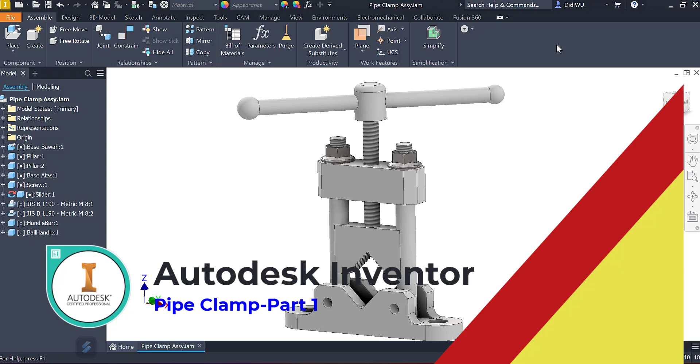So today we are going to create this pipe clamp assembly like in the picture here. Right now I'm using the Inventor 2023 version, and this tutorial is intended for the beginner level. So let's get started.

In Inventor, you should have a home here. This is where your project comes, so I'm going to close my previous file. Then you can create a new project. The project basically manages all your projects. Right now I'm currently working on the CADCAE.

This is where the project is saved under your directory. Click next, and use the library if you have any previous library from your previous project to import into this new project. Otherwise you can skip it and click finish. If the project path doesn't exist, it should be created, then click OK.

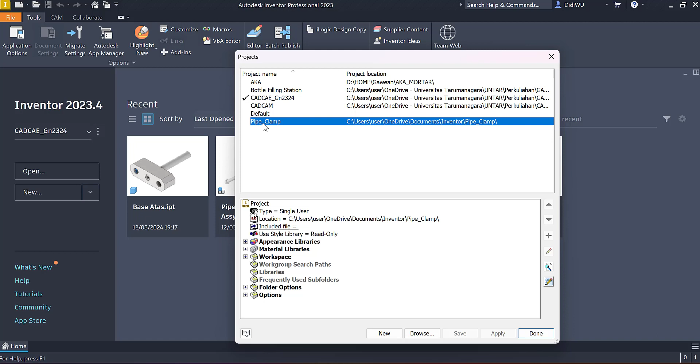Right now your project is not active yet. The active project is the previous project. So when you want to activate it, you need to close all the Inventor files first.

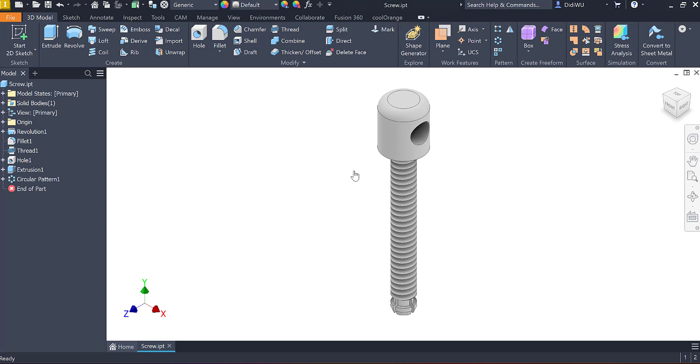Do I have to wait? I think I have to open this one up first. This one has to be open, Inventor project. Really, I need to close all the project files. Okay, you can look up the close all files option.

Then I change to Pipe_Clamp here. So this one is a new project. When you see the new project, there are no files, so we can create one.

Usually I use the new option here, but instead of using part or assembly - part basically is just a single part of your design, and assembly consists of multiple parts, with relationships between each part so Inventor knows how they assemble together.

Drawing is basically for creating the 2D drawing for documentation, and presentation is to create the exploded view from the 3D model, and then you can also generate drawings for documentation.

I usually use the browse template here, to make sure my template is in metric. So here there is a sheet metal, DIN standard, and also the millimeter standard. I will choose the standard millimeter.

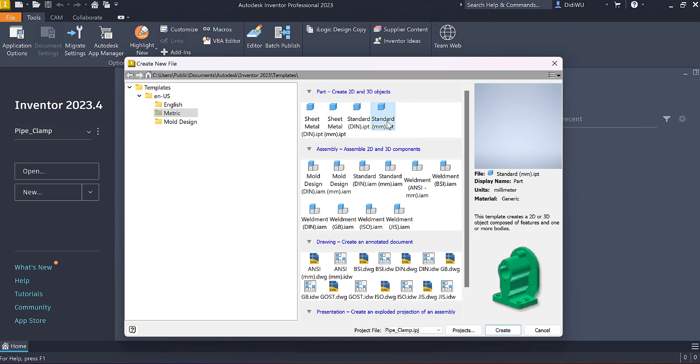So if you are creating a design which does not consist of sheet metal or thin plate, like this example picture here, then you should use this standard millimeter. So I will click create for standard millimeter.

So this is the part. This one should be part one, but don't bother with this naming because I already created multiple parts, so in this case they are counting 1, 2, 3, 4, etc.

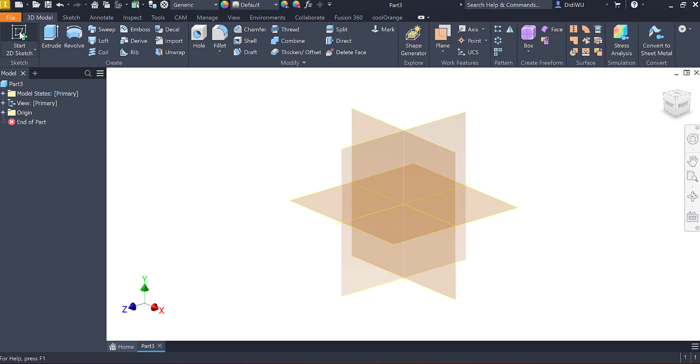Right now we are in the new environment, where you usually need to create a new sketch. I will use this plane, which is the XZ plane, because I want to work on the top view for the y-axis. So I click here.

Then I create the rectangle. When you hover your mouse into the center here, it becomes a green dot, indicating a center point. So I just click and move the cursor, and I can use this dimension here, 25, and to switch between those two dimensions, you just tab on your keyboard, then that one should be 100, and click enter.

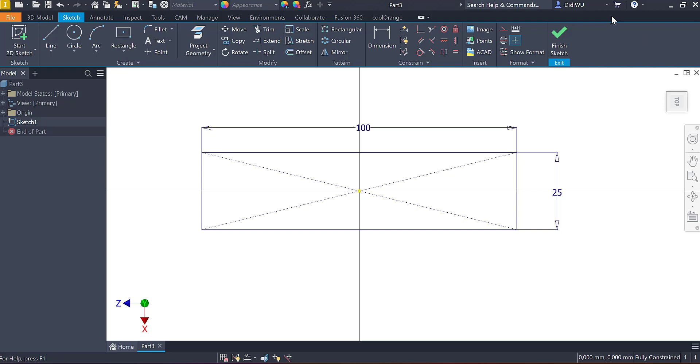Then it will create the rectangle for 25 and 100. So here we can click finish sketch because we already finished the sketch. Then I can use the extrude command. I will use 8 millimeters for the extrusion height, and then click OK.

Then I will create another sketch on top of this plate, and use the rectangle here. This rectangle should be on the center or middle, so I can use the vertical function - click vertical, and when you hover your mouse into the midpoint of this line, it will indicate a yellow-green dot.

Just click this dot for the origin. I should use horizontal instead, because this top view should be oriented with the x-axis - the horizontal is in this drawing. Why? Because as you can see, the x-axis indicates the horizontal, so when I click the horizontal constraint, it will align with the x-axis.

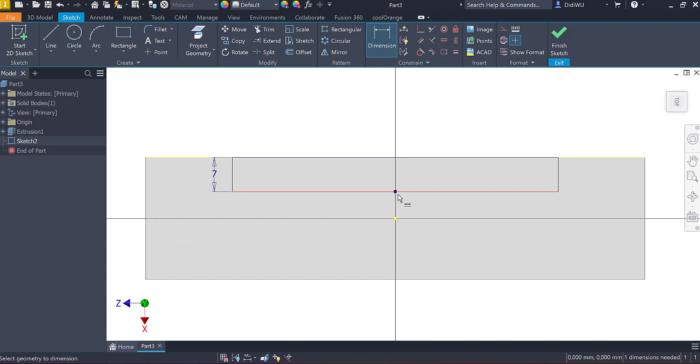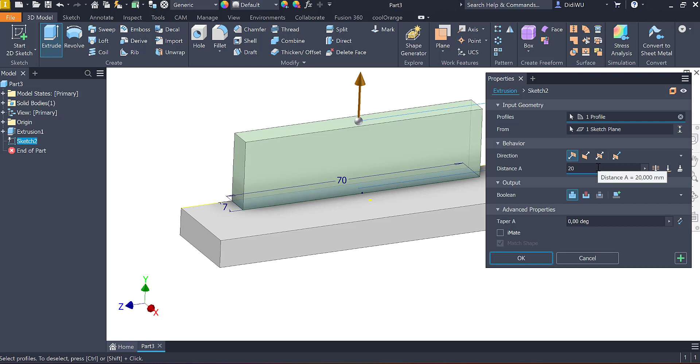I'm using, probably 20. I think for the first 20, that's enough. Then click OK.

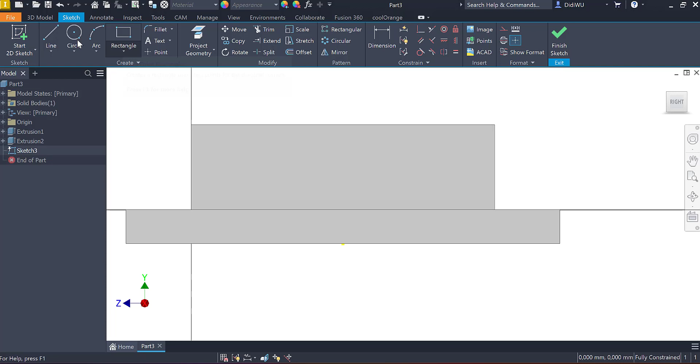I can create the sketch in here, probably from here. Then I will click the line to create the T-shape, which automatically creates the perpendicular when you click the line here.

So this perpendicular should be 90 degrees. Let me check the dimension. Yeah, degrees, okay, 90 degrees.

So I want to make sure that they are also on the center. So I click the horizontal - right now the y-axis should be the vertical one. This one, and this one.

So basically they will put this point right in the middle, but you can see the line here is not equal, so I will use equal line here and here. Then they were always on the same line.

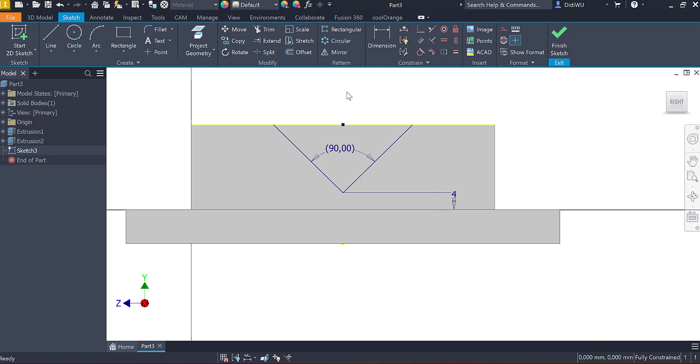Then if I use dimension to create the dimension from here to here, I will choose 4 probably for the dimension. So for checking, I can create this diameter of the...

...circle to indicate the pipe which is going to be planned. So in the design you should consider how large the pipe will be to fit into this shape.

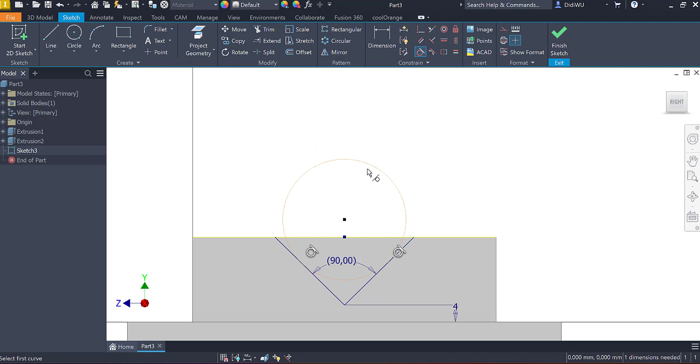Then I will click this one since this is just a construction line, so I click the line here and then click construction. So it becomes a dot path, and then I will use tangent from here to here and also tangent from here to here. And then I will use the diameter.

So for example, this pipe will be maximum 25 diameter, so equals to 1 inch more or less. Okay, I think it's probably good enough.

And then I will finish this sketch and extrude this one to make sure the extrusion is to all. Then click the line which is the cut. Then we will cut the part length. Then I will put the fillet over here.

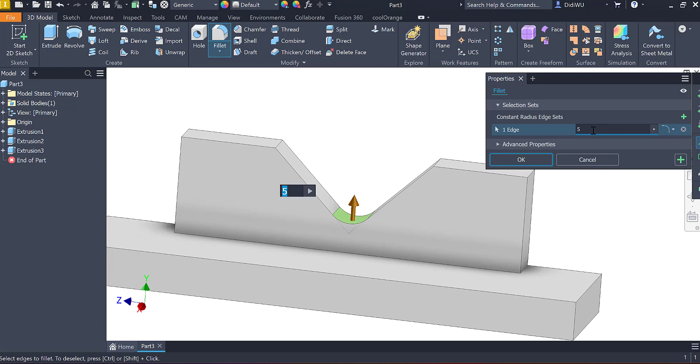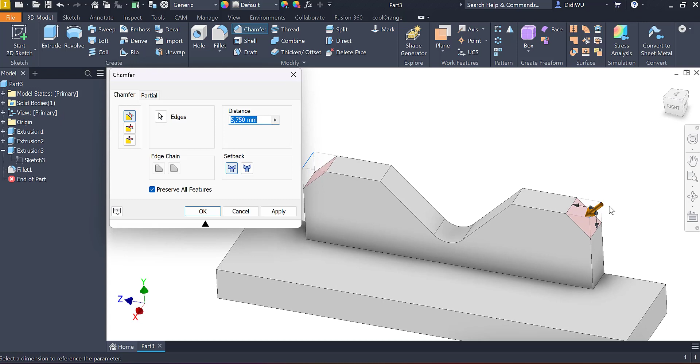Then for the chamfer, I could create a chamfer over here. But this chamfer, I think, is just for the appearance only, for the aesthetic, not for the functional.

I'm going to click this to add the chamfer over there. So then I will use the mirror over here as well.

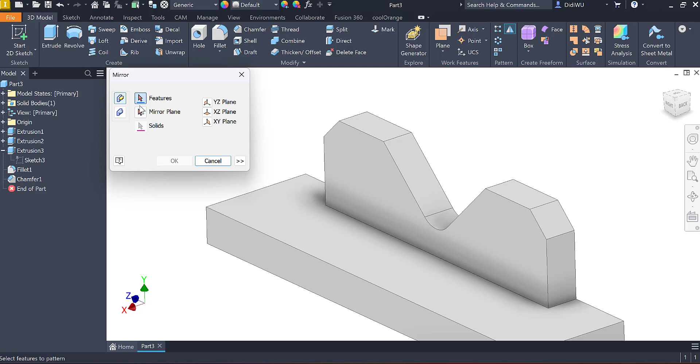So the feature will be this, and then the plane will be the YZ axis here, the YZ axis, okay, over there, and then click OK.

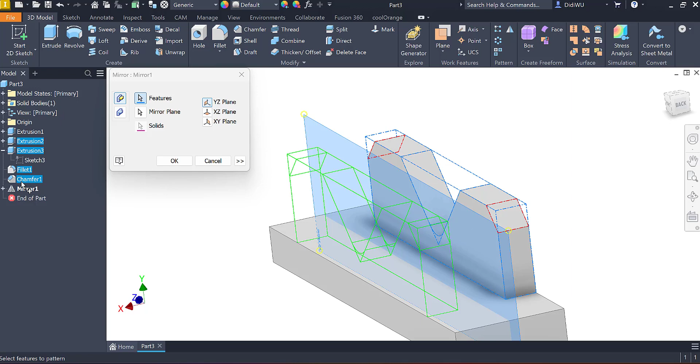I think it's the perfect position. Then I will measure, try to measure the gap over here - how much is the gap?

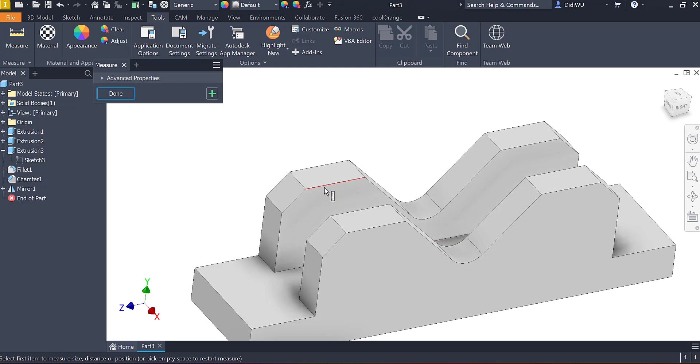So I use the measure here and also here. So the minimum distance is 11. So in between, I will use the pillar using the...

10 millimeter pillar. Before that, I will create a hole over here. Here I will create my hole over there. I will use the straight hole with none of the seat here.

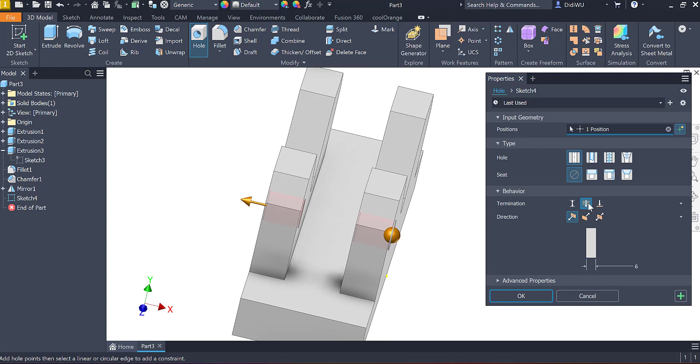Then diameter will be 6. Okay, then this one for the through all. One thing, I will use 6 for the diameter.

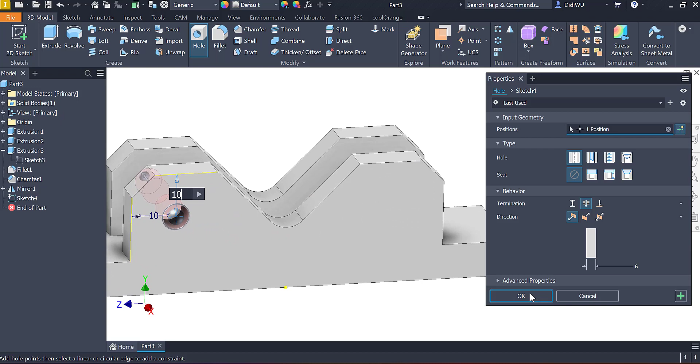Then the position - so for example, I want to make the position from here. This one is 10, and from up here is also 10, okay, 10 by 10. And then I'll click OK.

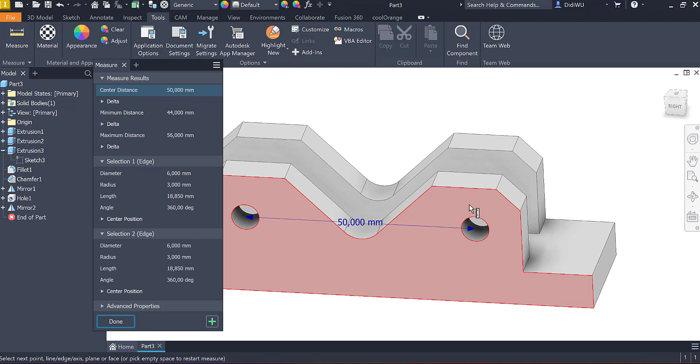Then I'm going to mirror the hole here with the mirror plane XY. So if I measure my center from center here to the center here, the center will be exactly 50 millimeters.

Okay, then I will use the fillet - this is the full round fillet over here. So full round fillet are basically just simple full round. This one for the A face, and this one for the center, and also this one for the B face.

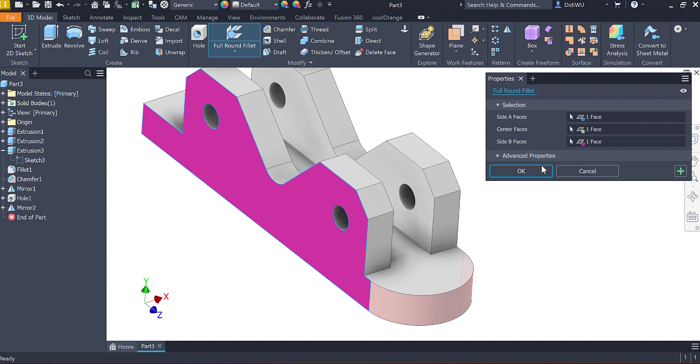And then one more time for the round here, here, and here. They will automatically create the full round fillet. Then I'm going to add the grid.

Right now I'm going to use the clearance hole with the counterbore seat, and I will choose JIS for the standard, using the hexagon socket screw, and I will use M5.

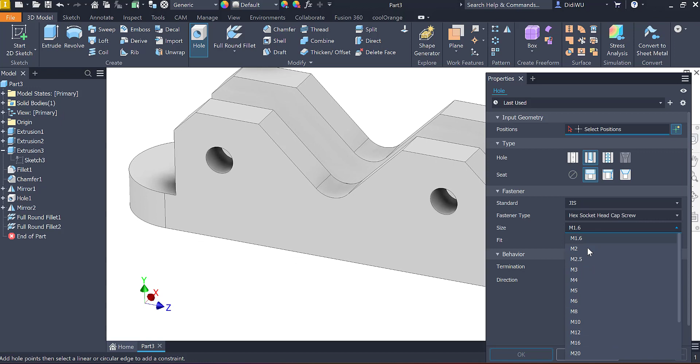I'll choose this position and this one to make sure the hole is concentric with the round over here. Since you already have one hole, if you want to add more, just click plus here, and it will create exactly the same parameter as the new hole. Okay, I think we are done creating the base view.

Then I will save the file. This is the part plan. I usually create a new folder to organize the part, so all my parts I will save there. This one is the bottom base, so I'll create the name with the bottom base.

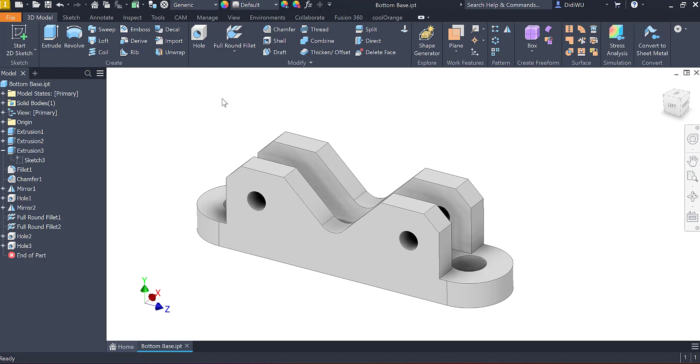Right now we are at the part level. If you want to create another part, I'm going to use the bottom-up method for this modeling. So I should come here and create a new assembly. I will close the template, then create the standard millimeter IAM, which is for the assembly file. We click here, and the environment is slightly changed because there is an assembly here. Right now we are entering the assembly level file, but there is nothing inside.

So you need to place a part at least, or create a part. Since I already created the bottom base, I will call it using place here, search for the file bottom base, and it will open. Basically Inventor will allow us to put all our objects into this assembly.

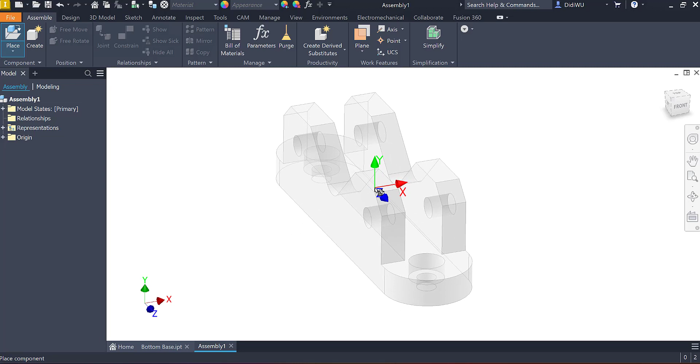But I suggest you right click here and place grounded at origin, like that, and then just escape. So when you see the icon here, there is a pin over there, meaning we cannot move this bottom base because it is already grounded to the file.

Then I try to save first, but please do organize your folder. Just click your new folder, and I will create a new file, a new folder using SE, double click, and create the clamp pipe file. That's it, so you can put the Assy name or not, it's up to you.

Right now we are entering the assembly level, so this one is a base IPT level or a part level. As you can see, the menu is slightly different—there is just only 3D model, but here there is a design, and also there is an assembly.

Right now we are going to create a pillar over here. Since I need another file, which is the IPT file, now we create a new file.

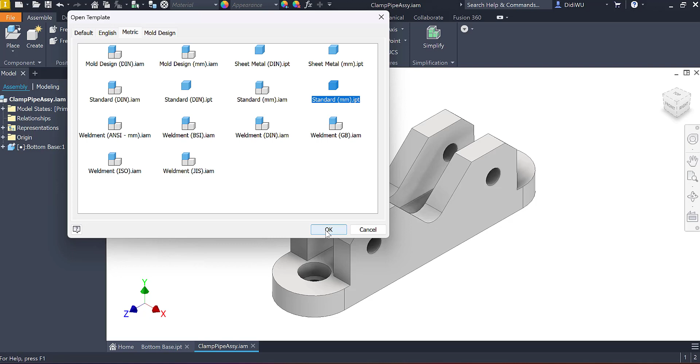This is if you want to create a new IPT file in this assembly location, you can do it. First thing you need to create the name, so I will use pillar, then for the template please click here—this is the metric template, I will use the standard IPT file. Usually there is a check mark here to make sure the constraint to the plane, but right now I'm not going to constrain it first, and then I will click OK.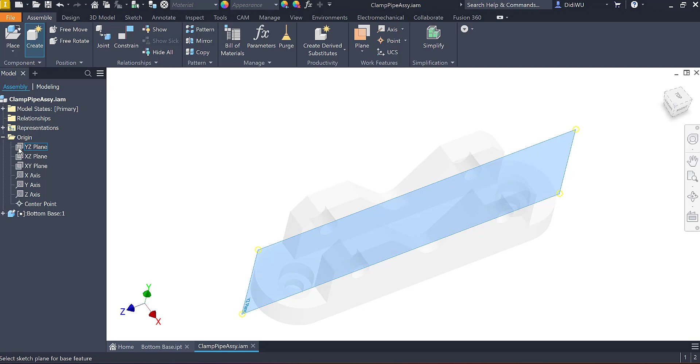Then here I will use the origin as my reference. I will use the YZ plane, then create new steps, and create an XY plane here.

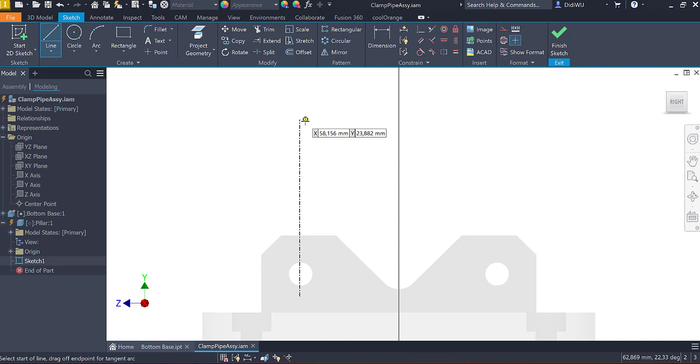We are underlying on the previous part, which is the bottom base, but from here we don't have any relationship with the previous part, so it doesn't matter. I just click line to the vertical line here. Since this one will be a center line, I click that line and then click center line, then create the line here, like this, to the bottom.

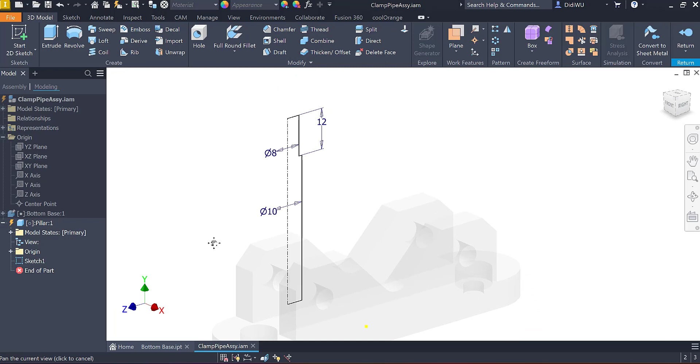Then I will create the diameter here—this should be diameter 10. I will use 10 for the diameter, and this one I will use 8 for the diameter. For the length, I don't know how much we need yet, so I'll just guess with 12 first. Then give me steps, and I will use revolve—just automatically revolve it, and then revolve.

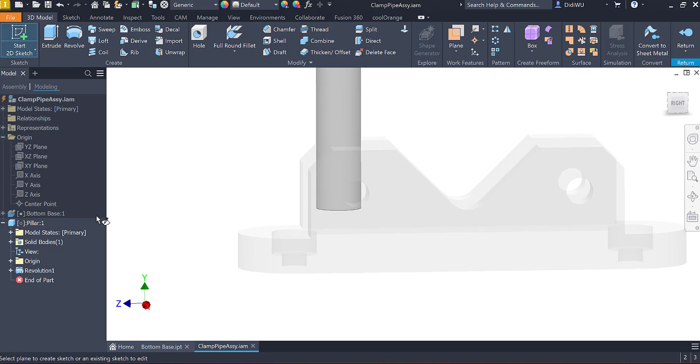As you can see, our pillar here is already in place, but we don't have any hole for that. So to create a hole, I need to create a new sketch—I think I will use the same XY plane here, then create a point over there. I click a point, you can see here there is a point, but when I put it into this cylinder, they will disappear.

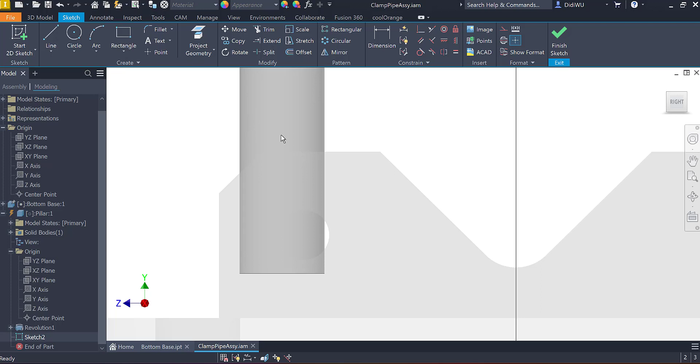Okay, when you press F7, that's for slicing. Inventor will slice all your solids into the right plane or sketch plane.

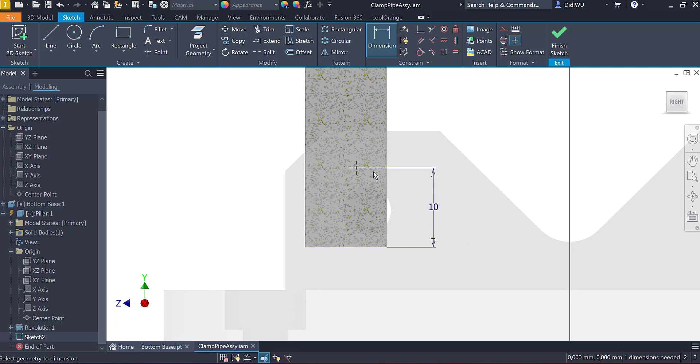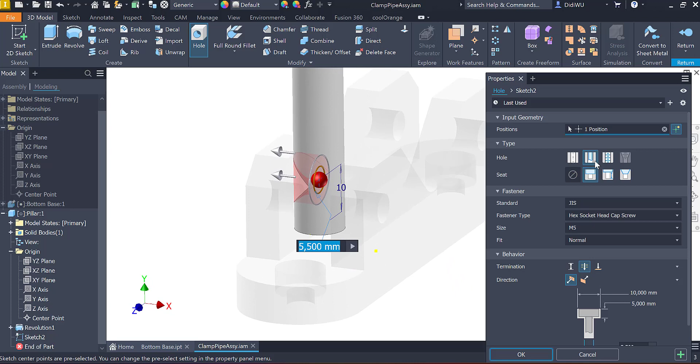I will use this kind of shape here, symmetrical there. Previously I used 5.5 - actually I think previously we were using 6. Okay, like that, then I will return.

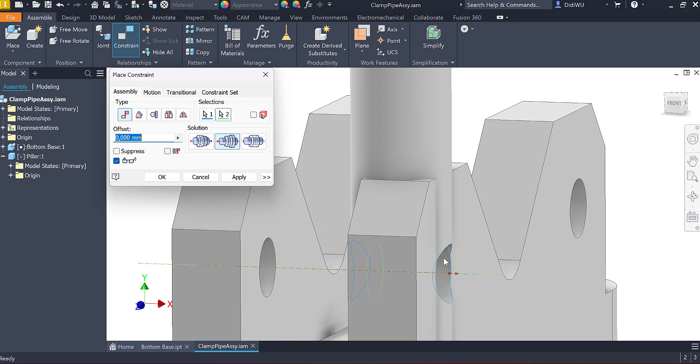Since we returned, we are already placed into the assembly level. I will use the constraint here to create the constraint for this. When I put it inside here, I will click the face of it, and also the face of it.

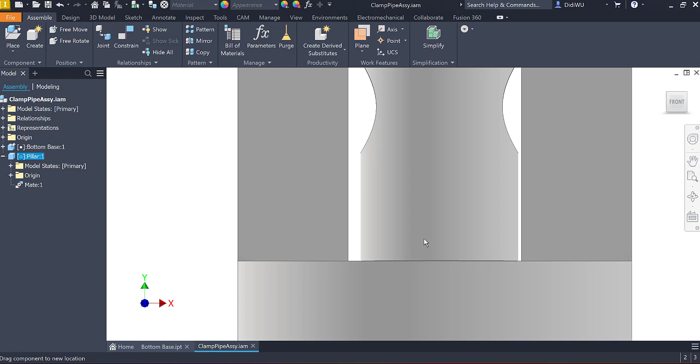Then basically this hole will align at the same center point. As you can see, I think our hole does not fit together with this one. So I need to modify the hole position - maybe I will not use 10, maybe I will use 8. Put it first, then there's a small gap.

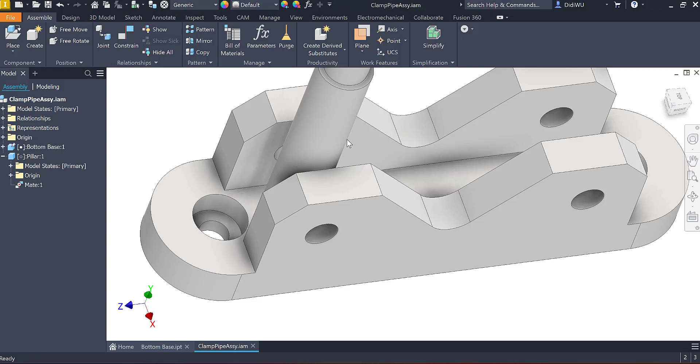But this one we still can move in the axial direction. So I will use this constraint to create the same plane - that one is the plane. I will match it with the bottom plane here.

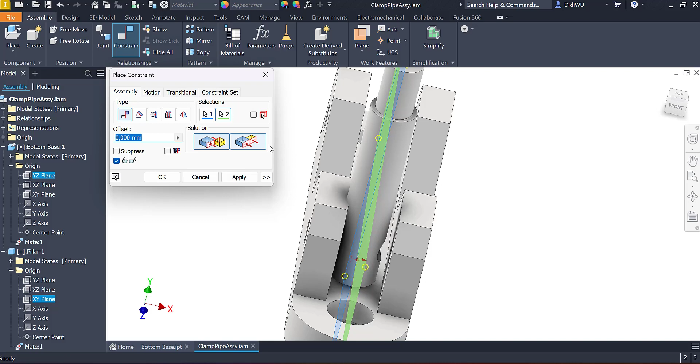So right now we just move like that, I think it's enough, okay for this for now. We are not sure about his length, but I will copy this pillar - before that I will set it first. Since you already have one pillar here, if you want to copy it, just place your pillar here.

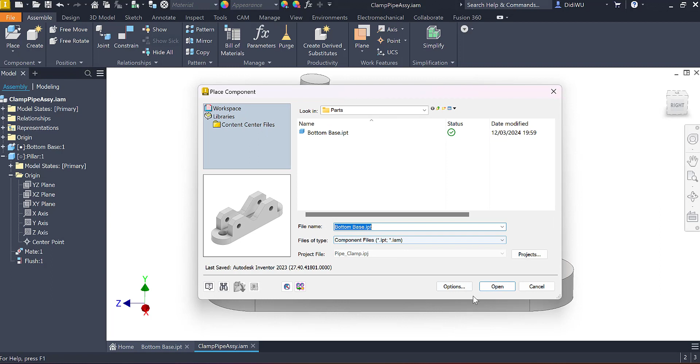Misplace this one, it's okay, then I will put it over there. When the orientation doesn't fit when you insert or place a component, you just right click and then rotate with the z-axis here. Okay, like that, so use again the constraint for this one and this one.

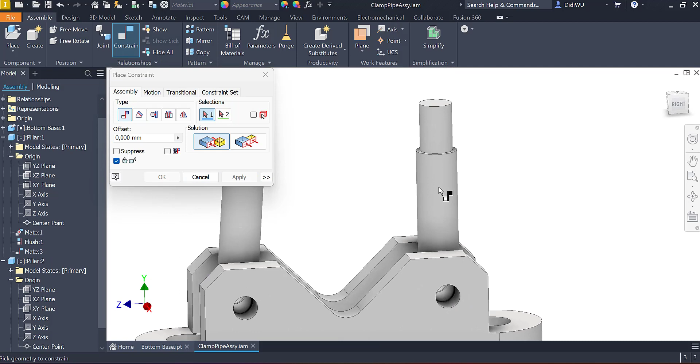Apply, then constraint again for the second pillar, which is the plane here, which is one here. Apply. So it's the same, right? Okay, right now we are set again.

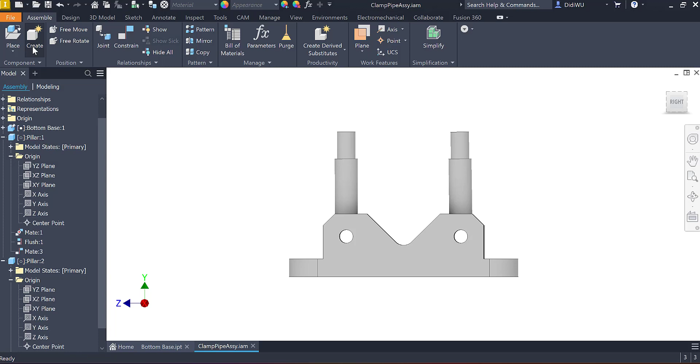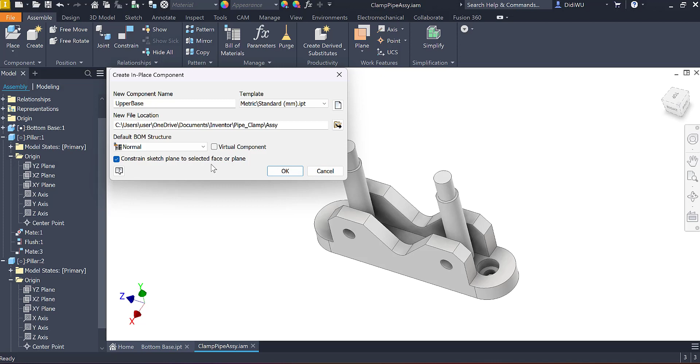Then I need to constrain to the face. Selected this, so I'm going to reference this one, reference this one. Then I create this at the top.

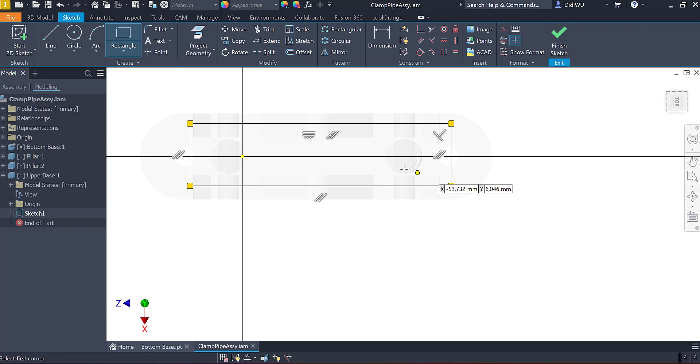Then I will use the rectangle - the dimension of the rectangle would be 80. Then 20 for the... yeah, I think 20 is enough, let's see 20 right now.

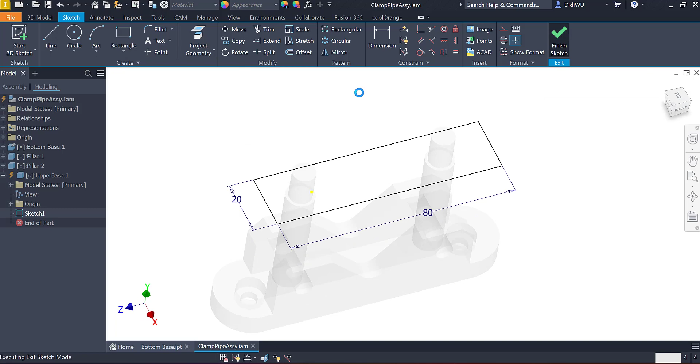Okay, then don't forget to create extrusion as well, so the distance will be I think 18 - yeah, 18 is okay. Then I need to create a hole for this one, so I need to point 1, 2, 3.

So before I use this, I'm going to delete this. Then I'm going to use a line to create better construction. Create construction, then I will use this one with the midpoint - this is a midpoint.

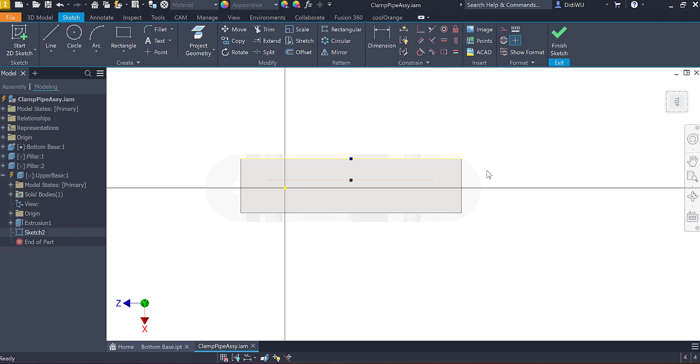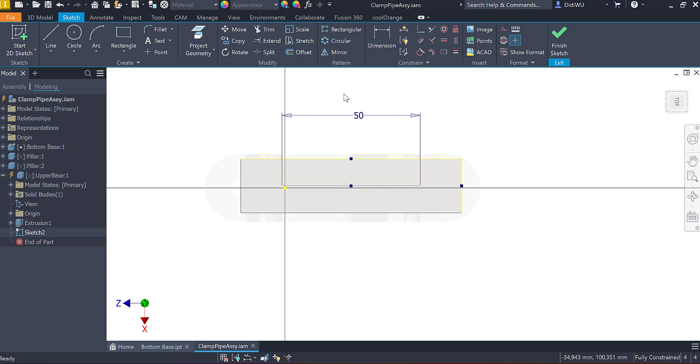Then I will use the horizontal here with the same midpoint, horizontal. So basically that one will be your horizontal. And equal dimension - as I remember, our pillar will be equal to 50 each part. Okay, then yeah, I think it's enough.

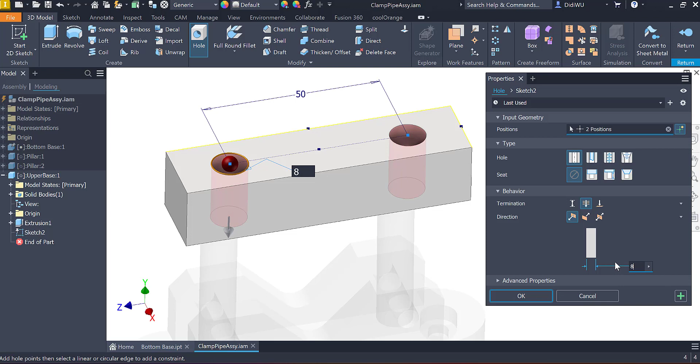Click OK, then if you create a point you can select the position for this one, and also the other one. Then you use the diameter will be 10 - oh sorry, it will be 8. Okay, 8 millimeter, then just click OK.

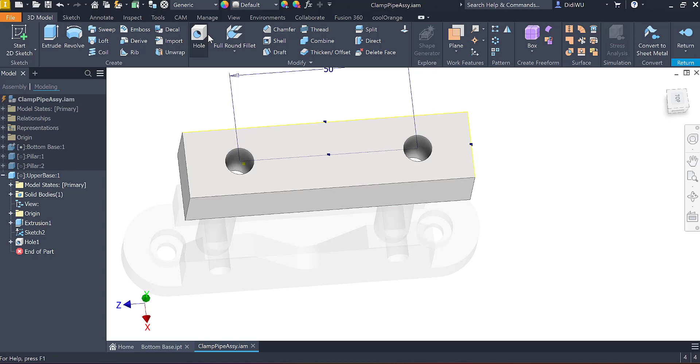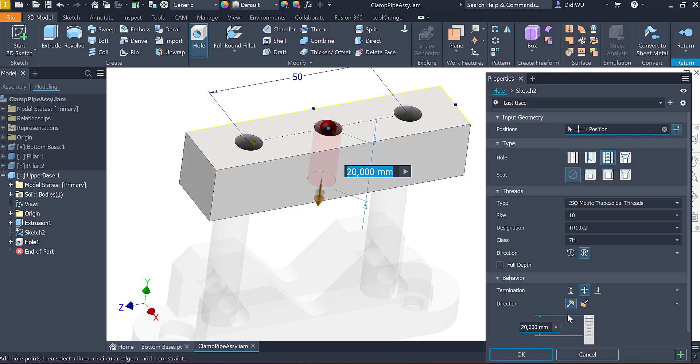I'm going to use the ISO metric thread, using the 10 millimeter diameter with the pitch. Click OK. So the inventor will have the thread function on this one.

Then if you want, you just create the chamfer here, or maybe the fillet, whichever one you like. Probably I will use the 6 chamfer. Then I will click it.

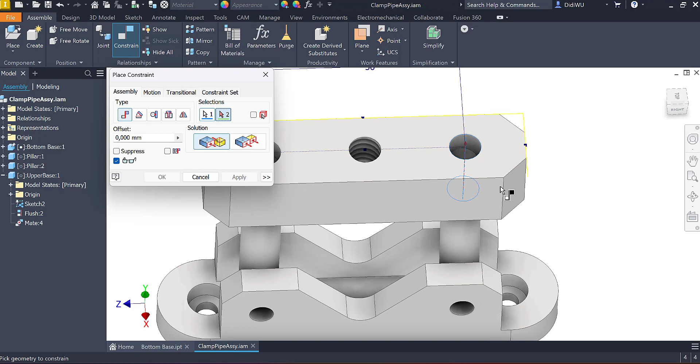Then I will use the constraint here to constrain the center point here with the center point here. Apply, and also the center point with the center point. Apply. So basically this one is already done.

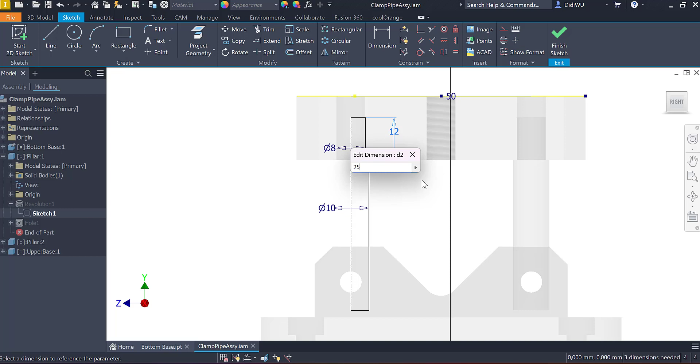But the pillar is not enough length, so I can still edit my pillar here. Remember, I will use this one, 12, I think I will use 25, that's enough. And also the line here, I will use 17, okay, then okay.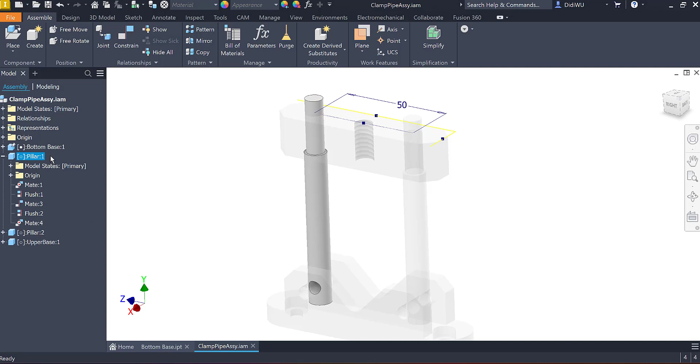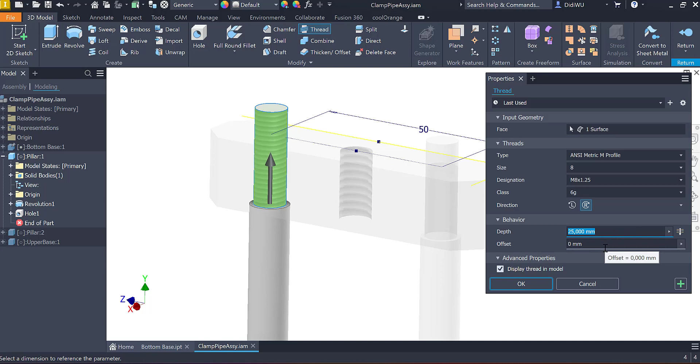We already done for this pillar, but the pillar also needs the screw over there, right? So here we can click a thread here, click the surface here, and this one is already consider the size, and I will use the depth of the thread. Use the thread, I think it's 10.

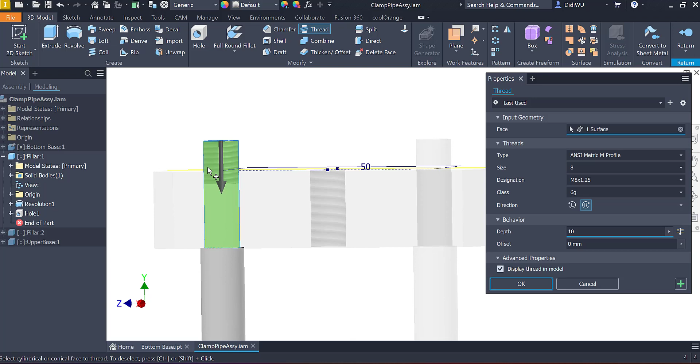I need to click the surface. Click here. When you misclick, you just click again here. So if you can see, there's a tap for this M8 here, I think it's the M8. Then click OK. So both of the pillars will have the same thread.

But this one in the Inventor is only the cosmetic thread, so it doesn't create a real thread. So when you want to create a real thread, you need to install a plugin. Later on, I will show you what the plugin is.

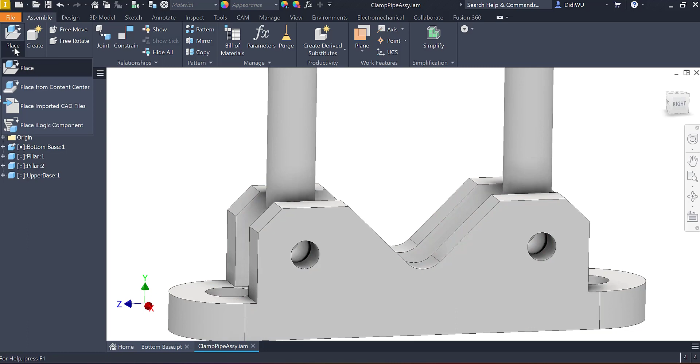Now we continue with the pin over here. This pin is basically, if you want to create a pin within a content center, you can use the content center here.

For example, if I want to click the standard part, in the content center you need to filter out the standard that you wish to use. If you click all, then a lot of standards will show to us. So I'll click the pin here.

I think I need just the cylindrical, the simple one, and then I will use the JIS, maybe the simple one here, that's enough for me. Click here, then click OK.

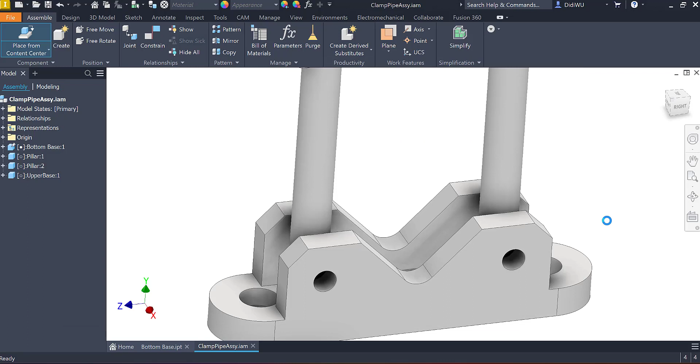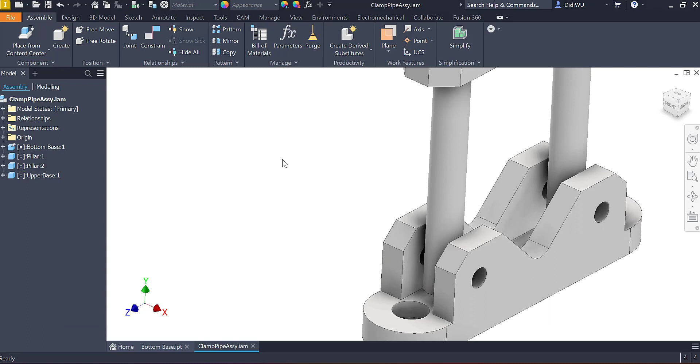Then the nominal diameter, so you can use the nominal diameter, as I remember I will use this one. How much is it? I think use 6, okay 6. I'm canceling right now because I need to make sure first, inspect, make sure this one is diameter 6, then the length will be from here to here, will be 25.

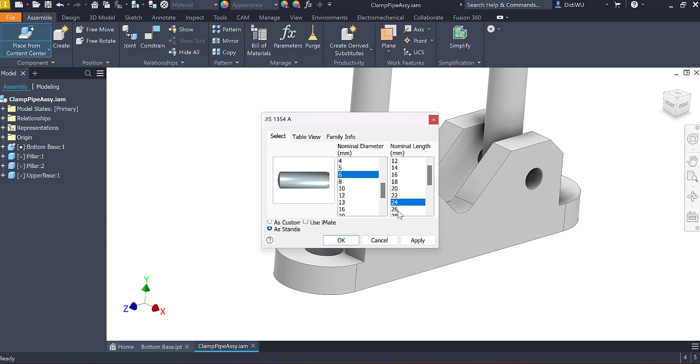So again I just go for content center and use this one, click OK, and then I will use 6 for the pin, and then 24. Since 25 is not in the list as a standard part, I will choose 24. Then I will apply.

That one, you can place it near 1, 2, because we need 2. Then you just constraint, you can use this one, this one, this one, and then okay, like that.

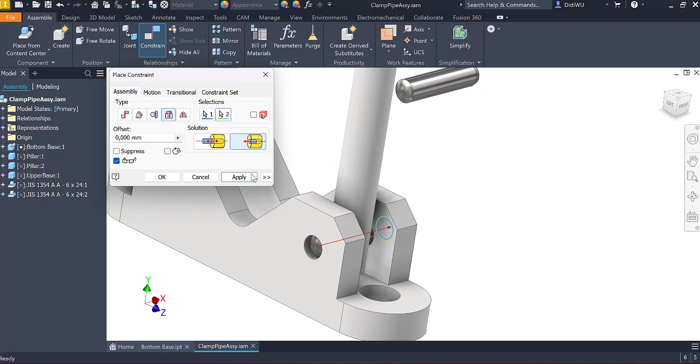If you want to have an offset, 0.5 of the, so there is some slight offset over there, or maybe use 1. I think 1 is okay. Then apply. Then I will also put it here or here with the 1 millimeter. So the pin is already in place over there.

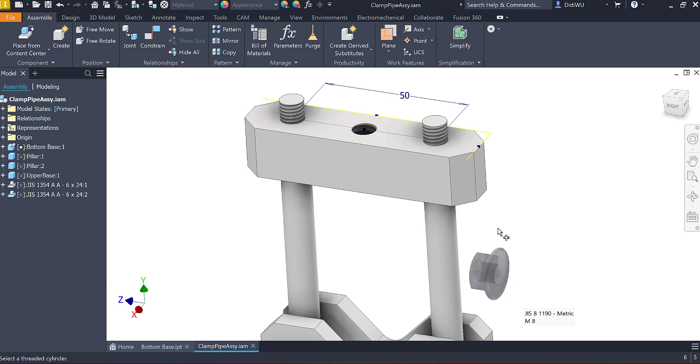Then if you want to put another standard part over there, you can just do like this, place from content center, since this one is the content center. Then I will choose the nut, I will choose this hexagon flange, I will choose this one.

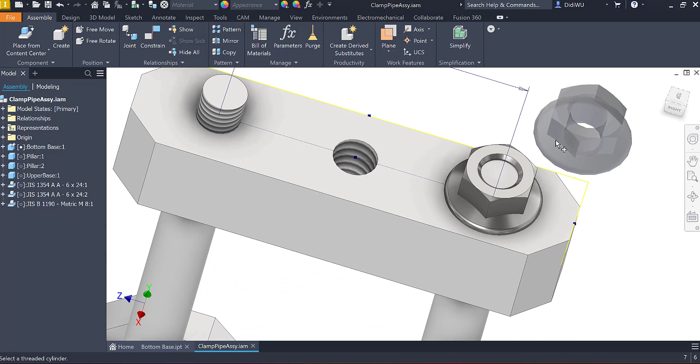So this one there's an auto drop feature, which is I just click here at the cylinder, and then I will choose the plane here for the placement. Then you use the apply, they will insert it. Just choose the cylinder, then they will hit how large the diameter, and this one for the plane. Then right click, done.

So this one is already done for the pillar. Right now we are going to create the screw over here.